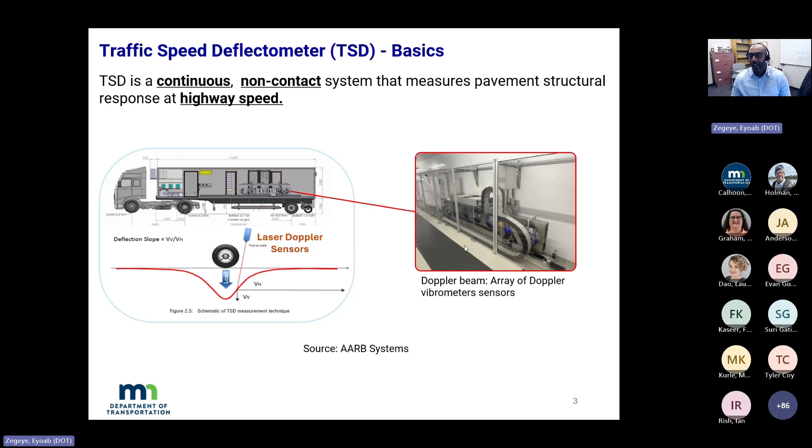So the key advantages of this: it means you don't have any disruption to traffic, you don't need to close the lane, but you are also collecting continuous data. So you have a huge amount of data continuously. You don't need to select where to test, and you can cover large areas, and finally you also reduce the concerns for safety and budgets.

Because of this, this is becoming a very important tool for state DOTs to start evaluating and possibly start using it alongside FWD and other testing technologies.

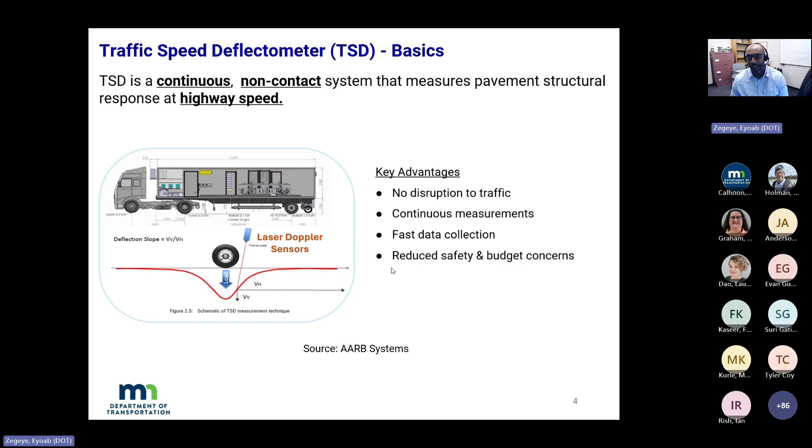So one key difference with FWD, for those who are familiar with FWD: the TSD does not measure directly the deflection of the pavement. What it measures is the velocities, vertical and horizontal. I am using my mouse just to indicate what I'm talking about, so if you don't see it, please let me know. So anyway, the TSD measures the velocities, and from the velocities we obtain the slope of this deflection.

This is an ideal plot, this is the function of a slope. I'm showing here the points where you measure deflection using the laser beams. This is an ideal thing. In reality, these measurements don't fall on this smooth function, they fall all over. So there are techniques you need to do in order to fit the function, from which you can then integrate that slope function and calculate the deflection bowl, which we use in engineering a lot of times.

So this is important that I touch on it before I go to the slides, because this is one of the reasons we are doing the study. When you move from slope to deflection, there are a few things that happen that could go wrong, or could be a source of error. One thing, as I said before, this is not a smooth curve, so you need to fit it. That is one source of error.

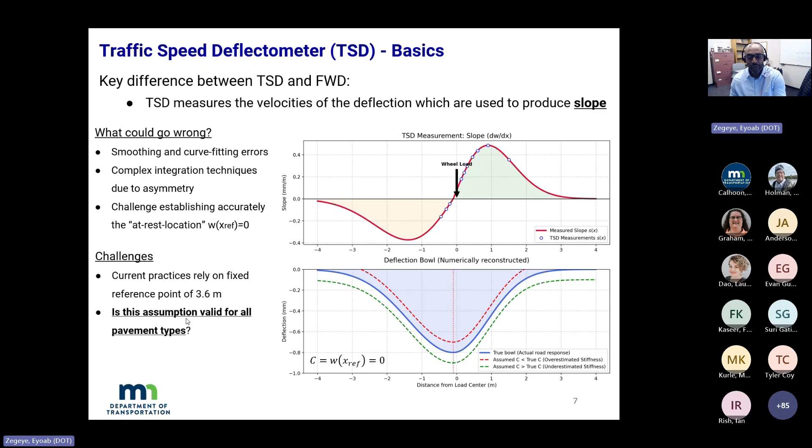What I'm going to argue today also is that the pavement structure, whether you have a stiffer or softer pavement, is going to affect those results. What I mean by that is what I'm trying to show with the results today. We are questioning: is it valid to use the same fixed reference point for all pavements?

So with that, some of the objectives we were trying to accomplish through the study were, first of all, understanding the influence of pavement structures and defining thresholds for critical response so that we can differentiate between good performing roads and bad performing roads.

The other objective is selecting appropriate data processing techniques and providing meaningful interpretation. We are not necessarily doing fundamental or pure research. What we're trying to do here is research implementation: looking at available techniques and seeing how we can use them for our needs, for our data, and how we can scale it up to analyze larger and larger numbers of TSD data.

We also touched on the data preparation procedures: what we have to do before we start analyzing this data. I will touch on techniques for segmentation and gathering supporting information, adjusting load and temperature effects, and some ways for automated techniques for identifying and removing outlier measurements.

Finally, another important aspect is how to manage and process very large volumes of data. Compared to FWD and other methods, we have very large volumes of data. So if you're looking not only to do simple calculations, but also back calculations, this is something we need to start thinking about: how do we analyze this large data, how do we use it, how do we report it, where do we store it, all those sorts of questions.

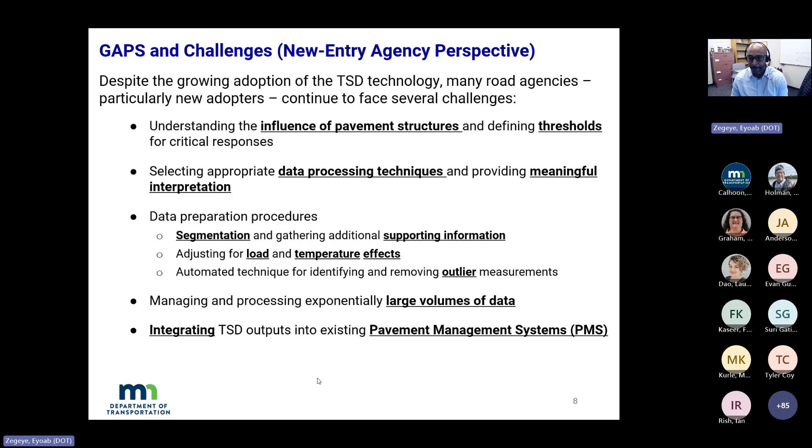The data set that I'm going to use for this study was collected in 2023, and because this was the first time we were collecting TSD data, we purposely selected the routes so that we can cover different pavement types. So we included flexible pavements, composite pavements, and rigid pavements. This data was collected in a day and a half, around 300 miles of road.

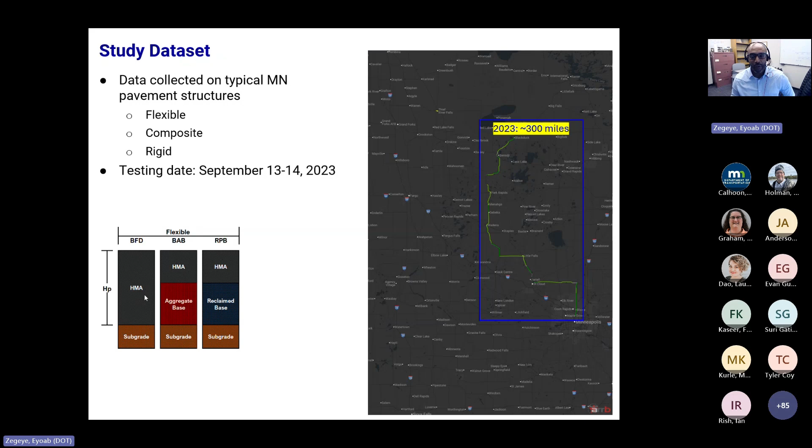So for flexible, we had three different types of pavements. I am using the terms used in MnDOT, but I will try to explain. By the way, here I'm using HMA to refer to bituminous mixtures. Most of these roads have been there for 50, 80 years, before SuperPave. So with HMA, I am referring to all bituminous mixes, road mixes, or HMAs that have been placed, and over the years they've received several treatments. So it's not necessarily one type of bituminous material. It's all mixtures that have asphalt binder.

So here in the first, we have what we call full depth bituminous HMA on subgrade. Then the more traditional is HMA over an aggregate base and a subgrade. Then here, what I'm calling pavement with recycled pavement base - these are originally HMA, originally full depth bituminous or BAB, bituminous over aggregate base, which over the years have been reclaimed. So a portion of the HMA and a portion of the aggregate base have been reclaimed and recompacted to create a new aggregate base, which also contains material from the old existing pavement. And then on top of that, an asphalt overlay is placed.

For semi-rigid, I'm referring to pavements that have been built as concrete, and then when they reach their end of service life, they've been overlaid with HMA to extend their life. Finally, the rigid pavements, which are just concrete. We've used them here just to compare the deflection and slopes from these different pavement types. But as you know, PCC requires different modeling techniques, different analysis methods, so we will not necessarily be talking about PCC a lot here. This is just for creating a benchmark, at least to look at what the slopes and deflection look like from these different pavement types.

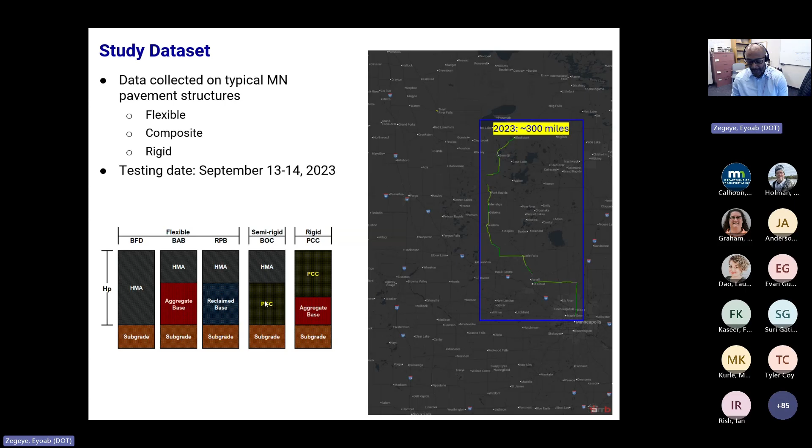So the data preparation part: after we collected the data, we started segmenting it into homogeneous segments, what we call here D-records - basically segments which have similar geometry, structures, and similar history. I must say, because most of these roads have been there for 80, 50, 100 years - this one, for example, was originally built in 1922. It was a concrete pavement, which later became bituminous over concrete because it was overlaid with asphalt. But as you can see, over the years they received many treatments, and there's a lot of information out there. So gathering all this information and segmenting the 300 miles into homogeneous segments took a lot of effort, a lot of time. This is something probably in future that we need to look at how to automate.

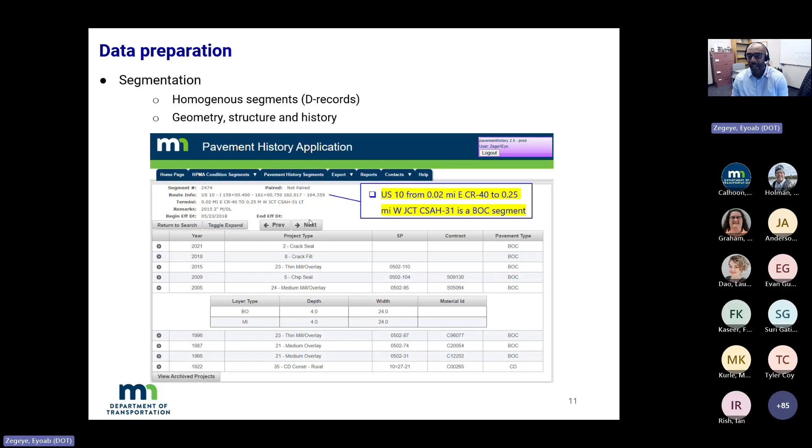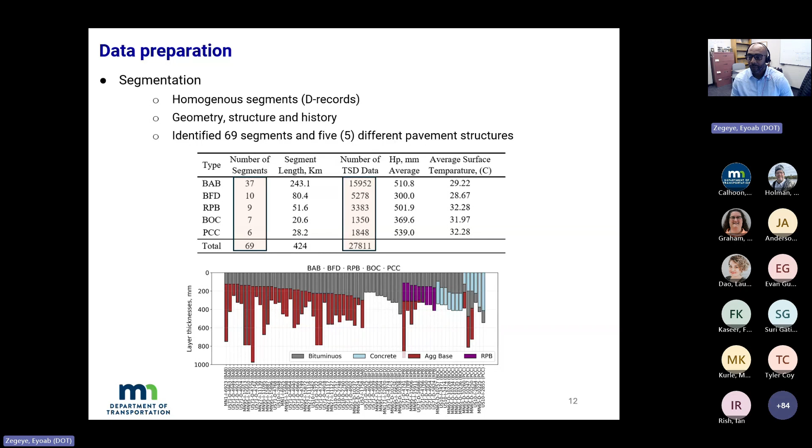So the first thing we did was adjusting for load. This is the load on the right wheel loading during testing. The fluctuation was not that bad, but we wanted also to normalize the deflections.

The deflections were already the slopes, already converted to deflection by the ARB system, so we've been working only on the data that has been provided to us. We wanted to normalize the deflection to 40 kilonewton, or 9,000 pounds, which is normally used. This is a standard loading system that we use for normalizing FWD and also TSD.

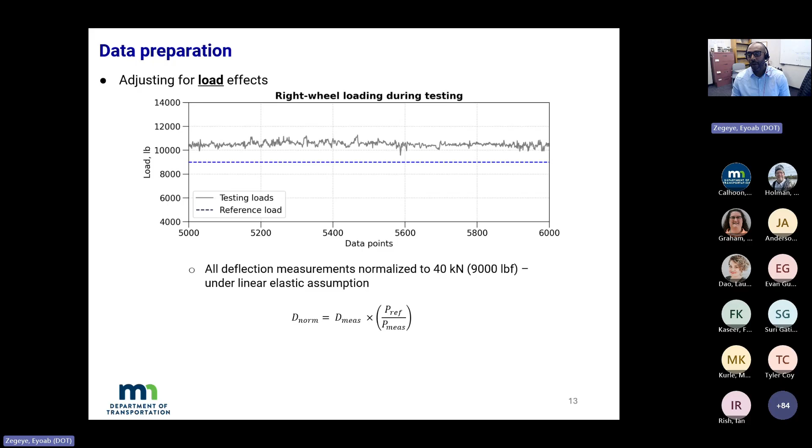It allows us to compare apple to apple deflection measured at the same loading. Once we normalized for this loading, we saw around a 15% reduction, but overall there was no huge effect of loading.

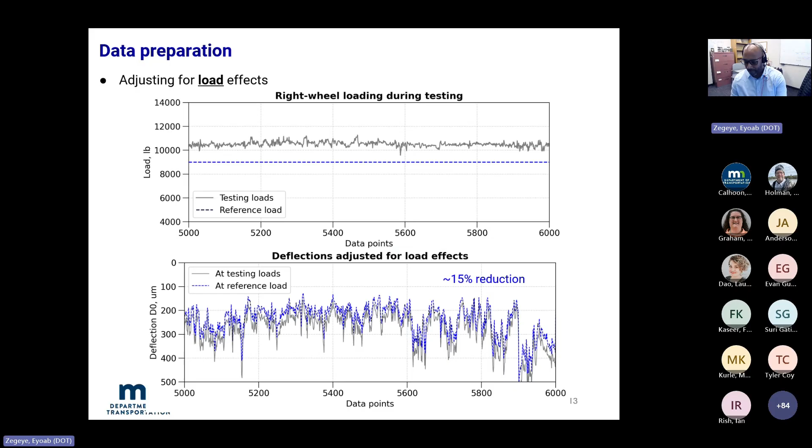On the contrary, as I will show a little bit later, the temperature had a huge effect. We had huge fluctuation in temperature.

So when we tried to see how to correct for temperature, we reviewed different techniques. One that we liked very much was the LTPP guide, which is on the FHWA website - a guide for asphalt temperature prediction and correction. This report has been around for the last 30 years, if I'm not mistaken.

But a lot of us know this report for BELLS equation. We have used BELLS equation to predict the temperature at mid depths for FWD analysis and others. So here we used it in this study, for example, for predicting the temperature at mid depths, knowing the surface temperature and the air temperature.

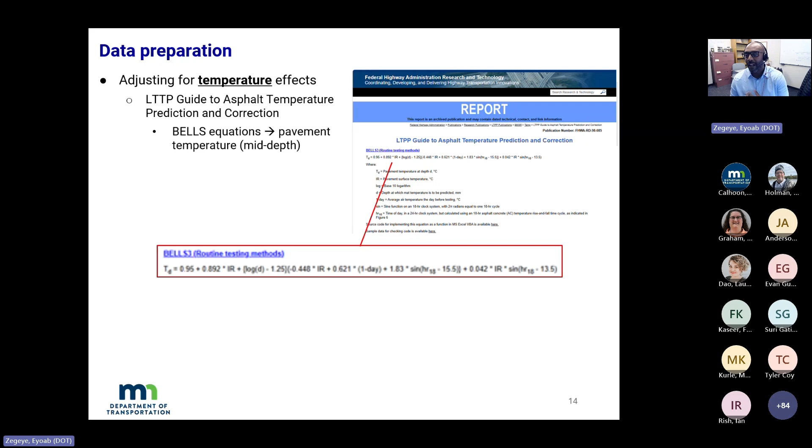But what many people, including me, have not used a lot is the second part of the equation in the report, which basically has what they call delta regression equations.

These are equations that have been developed using data from different testing facilities, including MnROAD, but others also in other parts of the state. So these equations were developed to correct the deflections based not only on temperature, but also on the thickness of the asphalt layer and the stiffness of the asphalt layer.

Here, for example, they are using latitude and longitude, because those are surrogates that tell us the PG grade, how stiff the binder is. Based on that, they are somehow accounting for the stiffness of the asphalt mixture, but they are also taking into account the strength or the structural condition of the subgrade.

These were, in my view, very sophisticated and complex equations. They have not been used a lot because they are very difficult to implement - I looked at the Excel macro, and it's very difficult to implement. But if you take time and understand them, they are very strong, and despite some limitations, a very effective way for correcting basins.

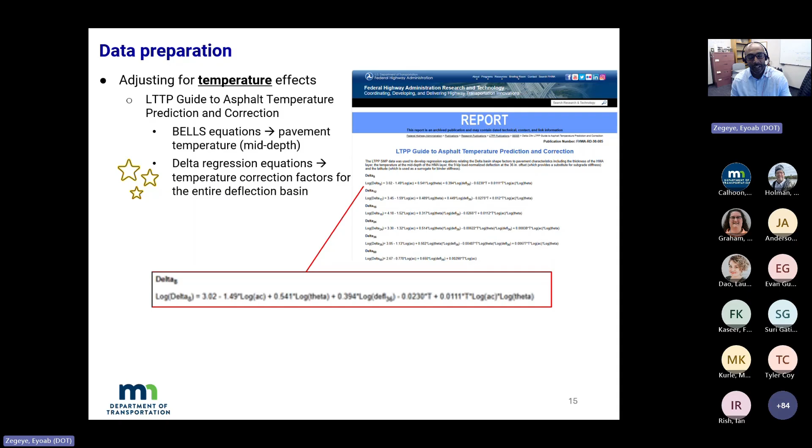The most important part of this regression is that it doesn't correct only the deflection at the loading point - it corrects the entire basin. So now I will show some examples.

So for example, here is the temperature fluctuation during the testing. As you see, early in the morning there was something, and then late in the afternoon there was a huge jump in temperature. It goes from 30 Celsius degrees to around 20.

So when you apply the technique for correcting the entire basin, here is, for example, if you take data collected at this point, almost close - if you correct it to a reference temperature of 21, since there's no huge difference between the 20 during testing and the 21 reference temperature, you can see you almost have the same deflection basin.

What happens if you take this in another place? This is where the testing temperature was around 37, and then if you correct it to 21, there is a huge shift here.

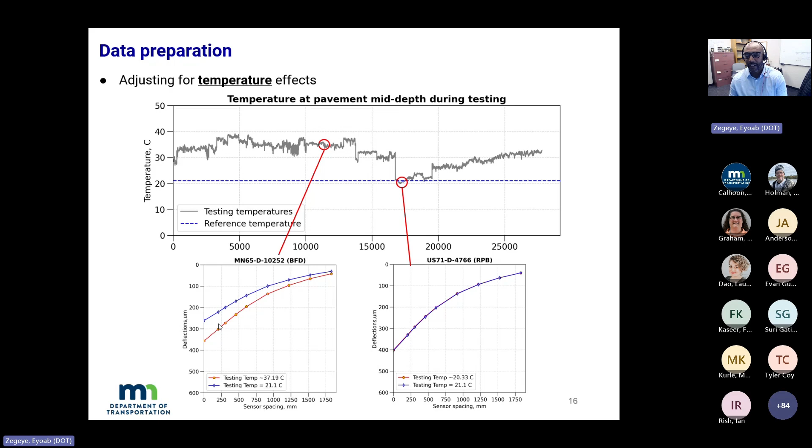So what we did is we applied this technique to the entire data except for the PCC, and then we corrected the entire data. As you can see here, there are areas that didn't need a lot of correction because of when they were collected.

For example, here I'm zooming in only on the data coming from these segments, and as you can see, there are areas where you don't need a lot of correction, and other areas where the temperature correction was needed.

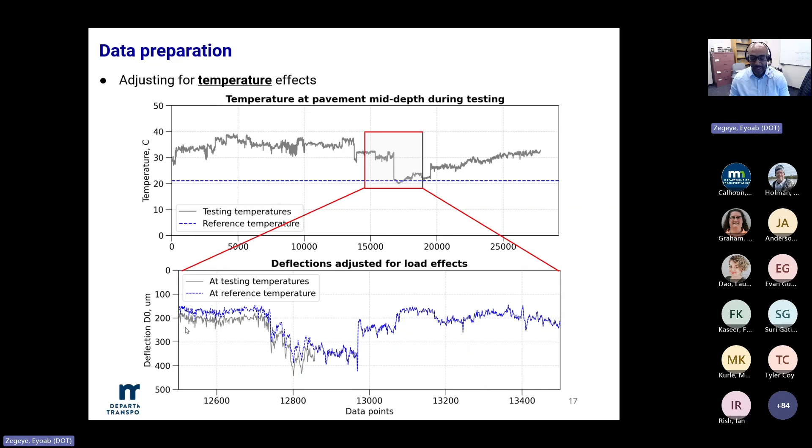After that, we also reviewed different techniques for identifying and removing outlier measurements. The method we ended up using and liked was the statistical method, the Z-score method for outlier detection.

If you use a sigma of 2.58, for example, given the distribution of your data, you're identifying the measurements falling outside of 99% of the data. So if your measurement falls beyond this 2.58, you're considering it an outlier, or flagging it as an outlier. The question becomes then, which parameter to use.

You can use the deflections, you can use some of the calculated empirical methods, but if we use the deflection, we don't have a clue what those limits mean. So once we processed the data using all the analysis techniques I'll talk about later, we examined all the TSD parameters to see which of these could be used as good metrics for identifying and removing outliers.

What we found is that the subgrade modulus, calculated using AASHTO 93 — I'll explain that a little later — we found it to be an excellent metric. One reason is that, since this is the subgrade strength or stiffness, it is less sensitive to temperature and surface layer conditions.

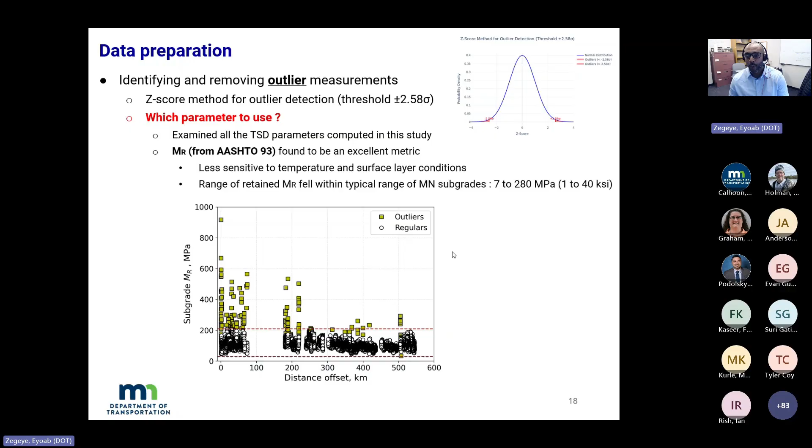But then, when we plotted the data using latitude and longitude, we liked the MR metric even more, because if you zoom in, most of these outliers — not all, but most — were falling into known structural transition zones. For example, most of them were detecting bridges, detecting exit or entrance ramps, transitions to bridges, or roundabouts, which are most of the time made of concrete. So we ended up liking the MR metric even more.

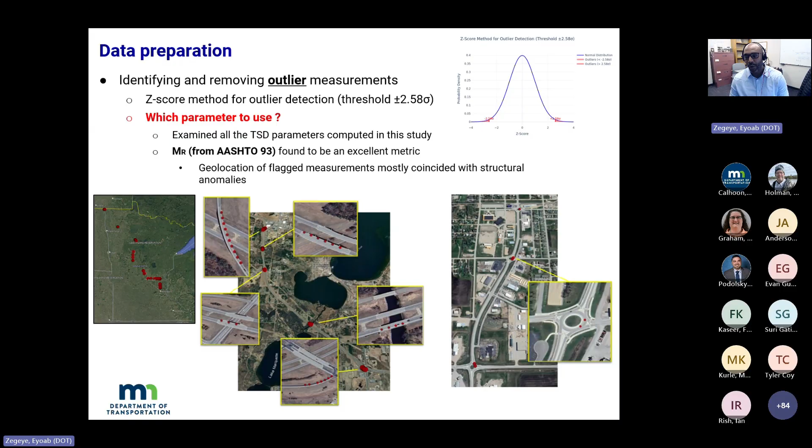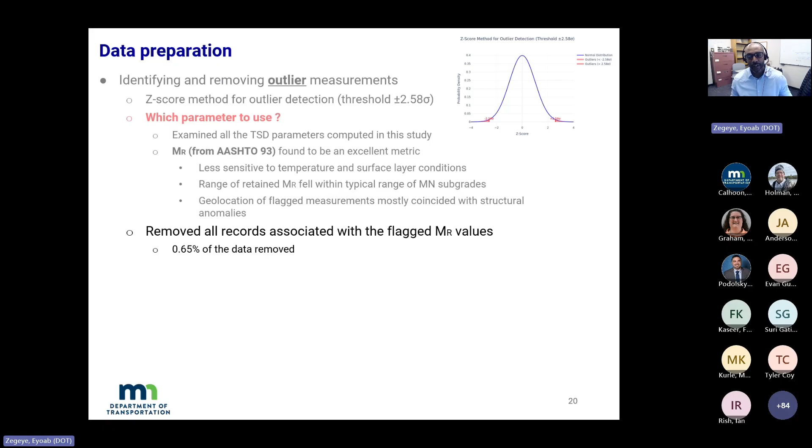So with this, we used the MR metric — once that subgrade modulus value was flagged as an outlier, we removed the entire record associated with that MR value. So next, we moved on and started analyzing the data.

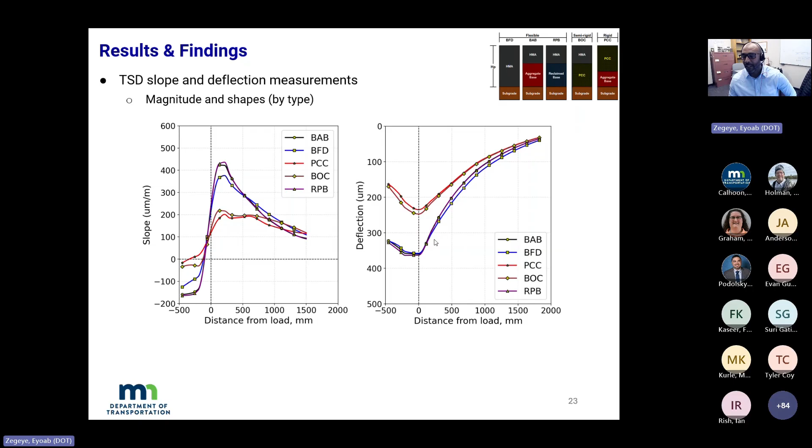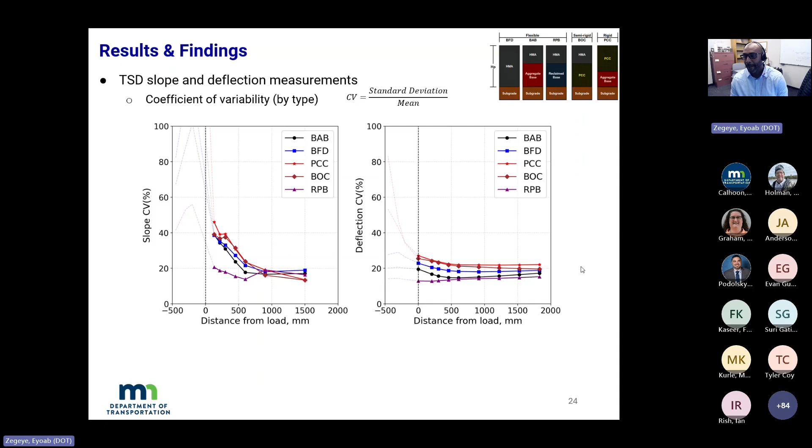So now I will start talking about the results after they have been analyzed using the different techniques.

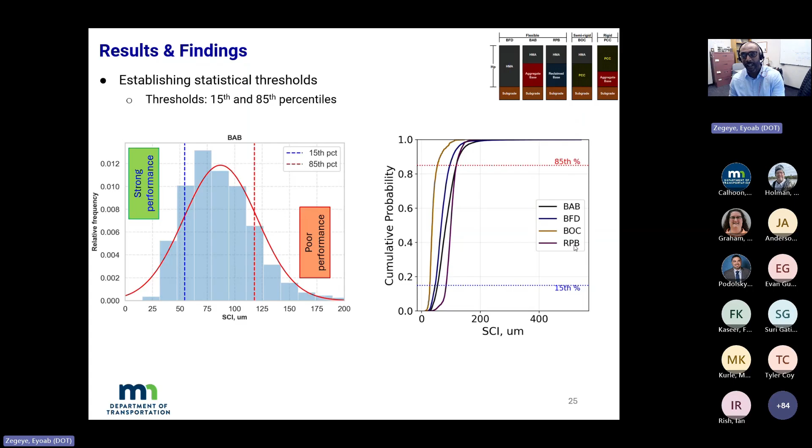The first technique we use is the deflection basin indices. These are very common, popular, and have been used in FWD analysis. These are simple computations, simple geometrical computations, based on the analysis of the deflection curve, or basin bowl, of the deflection. The most common are the SCI, the surface curvature index.

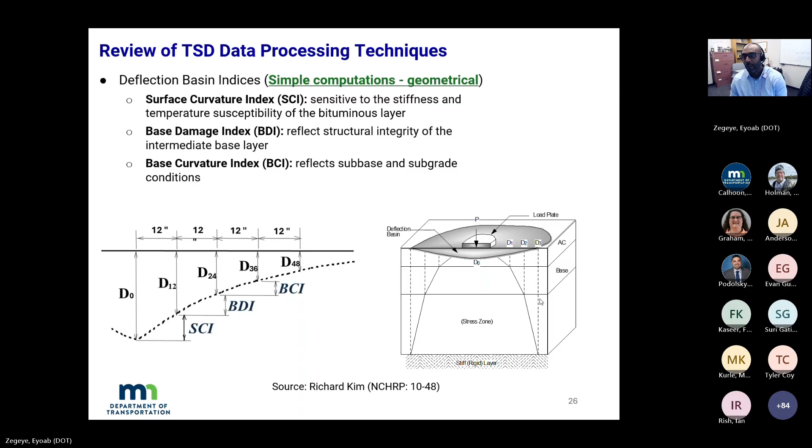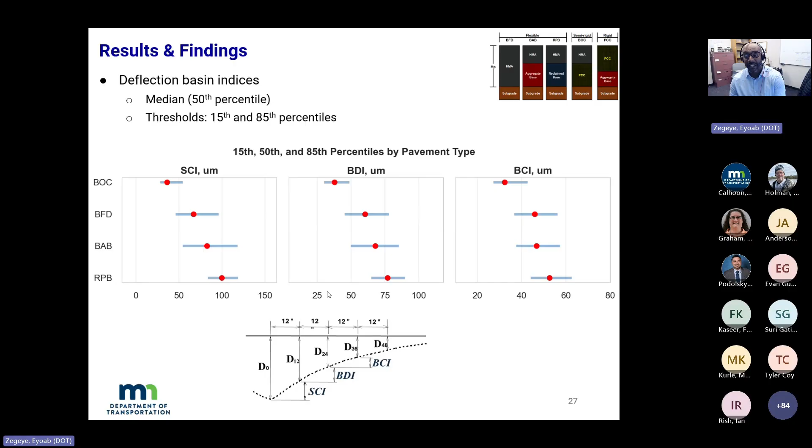I'm showing here, plotting the median and also the 15th and 85th percentile. So clearly these metrics identify the different pavement structures, and they have different values for different pavement sections, some significantly or statistically different.

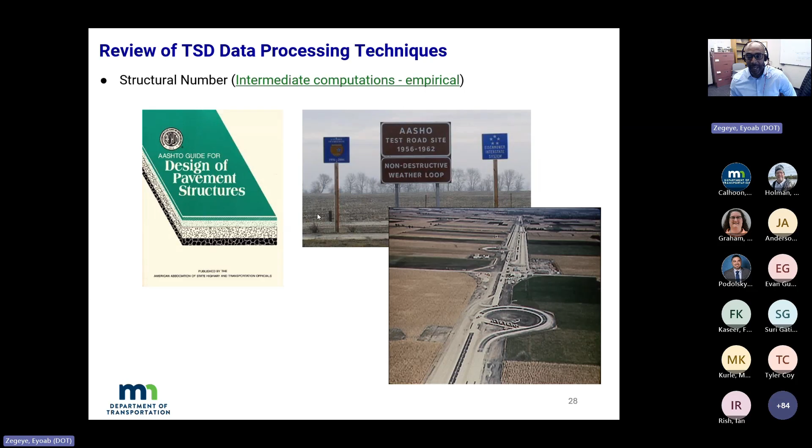Then we looked at the structural number. This is an intermediate computation, more involved. This is a technique developed based on data collected in the AASHTO road test in the 50s. These are empirical equations, associated with the AASHTO 93 pavement design equation.

This equation basically relates the anticipated traffic volume to the structural capacity of the pavement, to the strength of the subgrade, and to the functionality or serviceability required of the pavement.

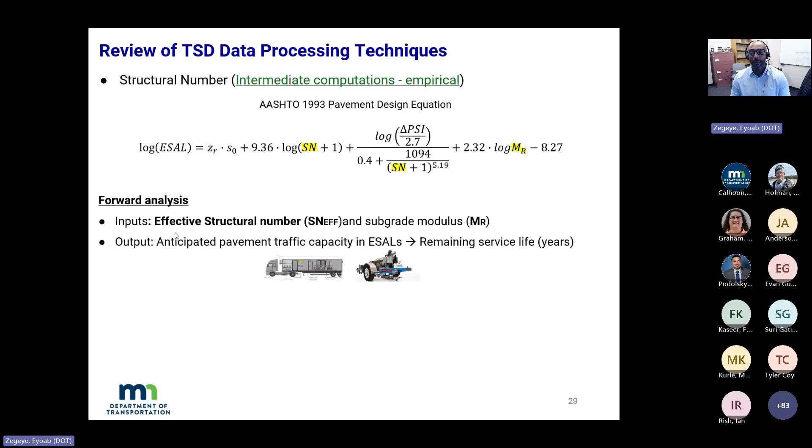You can do forward analysis of this equation: if you know the structural number, in this case the effective structural number, and the subgrade modulus, you can directly calculate the anticipated pavement traffic capacity, ESALs, which can then be turned into the remaining service life of the pavement. This effective structural number can be determined from TSD or FWD.

Otherwise, you can do the inverse analysis. If you know your desired pavement design level ESALs, you can back calculate to get the required structural number from this equation. So there's the effective structural number, determined from TSD or FWD, and the required structural number coming from the design equation, which most of you are familiar with since it's used to design layer thicknesses.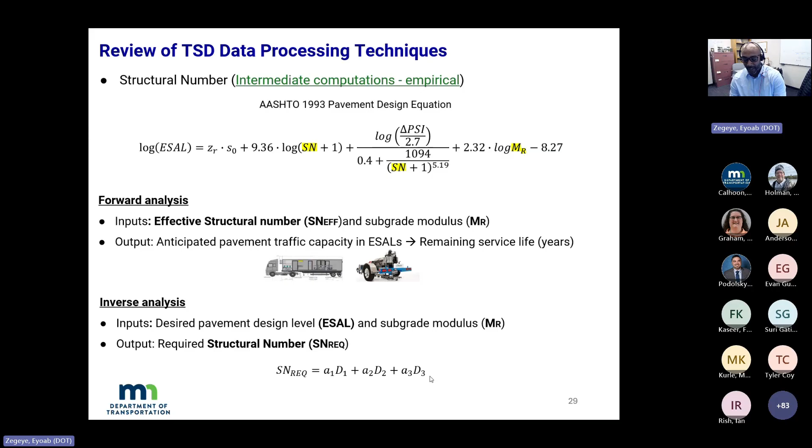The AASHTO 93 also provides equations for calculating the structural number and effective structural number. These are more involved, requiring iterative calculations, from which you obtain the effective structural number, the modulus of the entire pavement above the subgrade, and the subgrade resilient modulus MR.

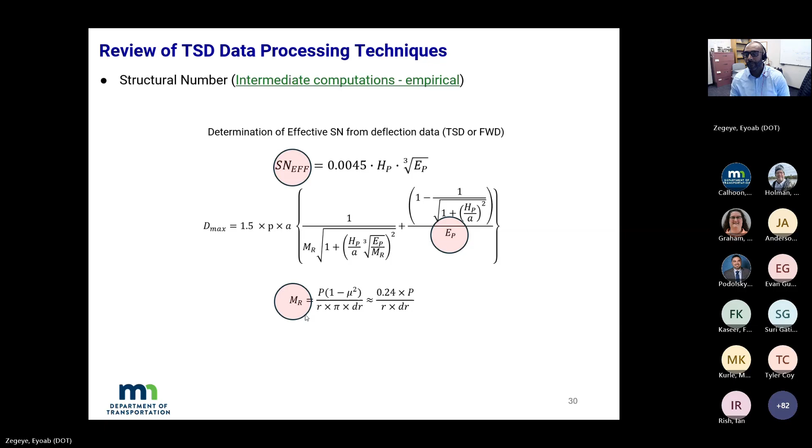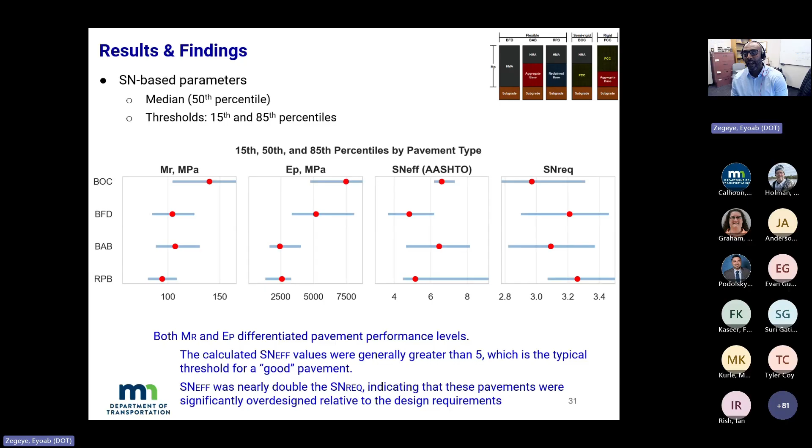We also looked at how this equation can be used to calculate the remaining service life, the ESALs. What we saw is that this equation is highly sensitive to the structural number and to MR, the subgrade modulus, because the subgrade modulus and structural number are used in their log version.

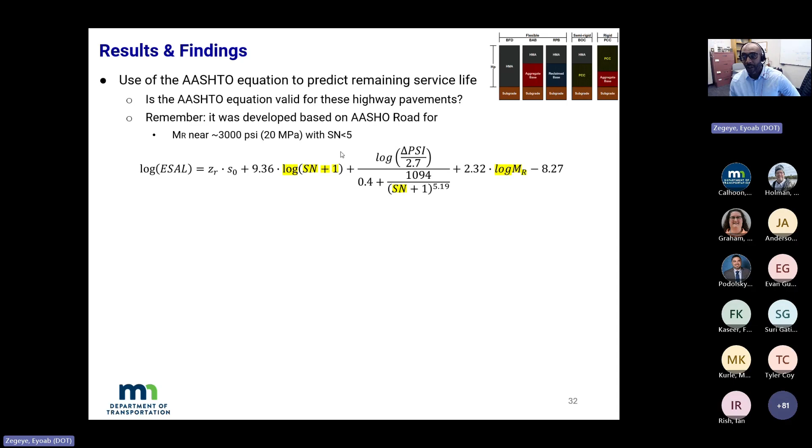When we reviewed the AASHTO publication, we found this equation was designed for subgrade modulus around 3000 psi, 20 megapascal, and structural numbers less than 5. When you use it for highway pavements like we did here, it starts giving you unrealistic numbers, because our subgrade moduli were much higher than 20 megapascal, on the range of 100, and our structural numbers were much higher than 5.

This is a question we would like to bring to the industry. Our view is that the structural number as it is, is not necessarily a good technique for processing TSD data from highway pavements, maybe more suited for low volume roads.

So then next we did back calculation. This is very complex computation. For back calculation, we adopted a software previously created for analysis of FWD data through a collaboration between University of Minnesota and MnDOT. We've published several papers on it, and last year we also reviewed its application for TSD data, so you can refer to that paper. But I will quickly tell you the main features of this software.

This software, in my view, is very slick because it can be used for batch processing. What you do is bring all your TSD deflections into a file, along with pavement geometry, layer thicknesses, traffic data, and temperatures, and put it into the software.

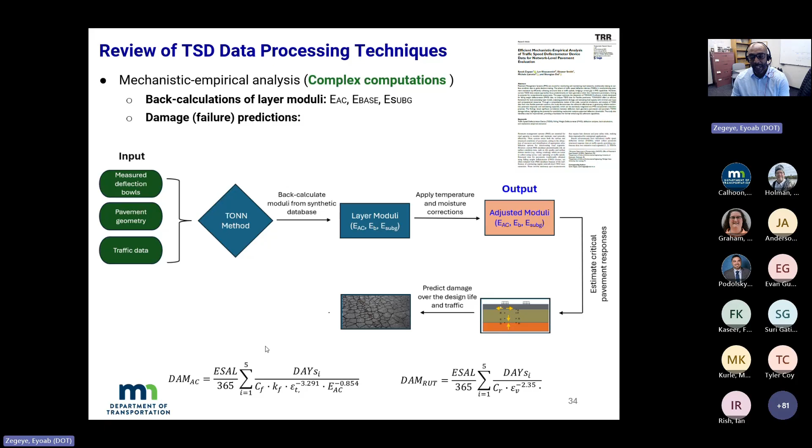Finally, it uses damage equations to calculate the damage indices, the fatigue for the asphalt layer and the rutting for the subgrade, and outputs the tonnage. All this is done automatically, taking about 7 seconds for 100 deflection points. So all this data I'm discussing was calculated on a regular computer in around 20 minutes. This is why we like it.

We are upgrading this technology now, with another contract with Michigan State University, to add some features, though as it is, it's already very strong.

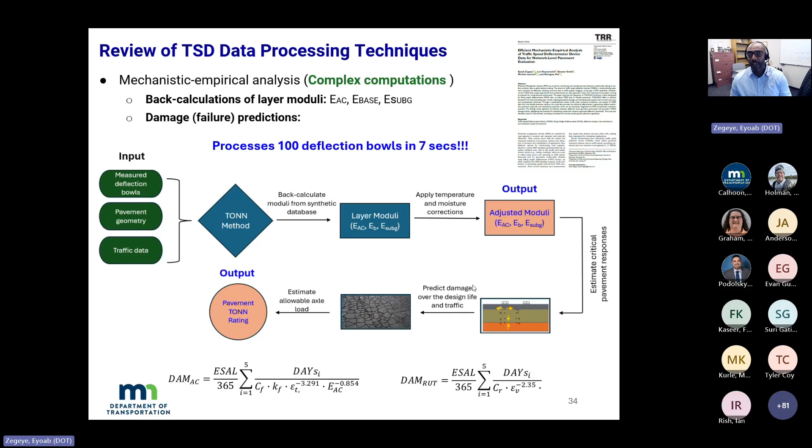The current version of the tool only allows for 3 layers, so we are not showing the BFD results here because that software wasn't necessarily designed for 2 layers. Here I'm looking only at the 3-layer pavements: BOC, BAB, and RPB. We saw it can calculate layer moduli.

I've also put the layer moduli results in a table. They were quite reasonable. One thing, maybe for the concrete base, I would have expected a somewhat higher base layer modulus, but in general they confirmed what we saw for the others. They do distinguish between materials and between pavement types, and they say almost the same thing.

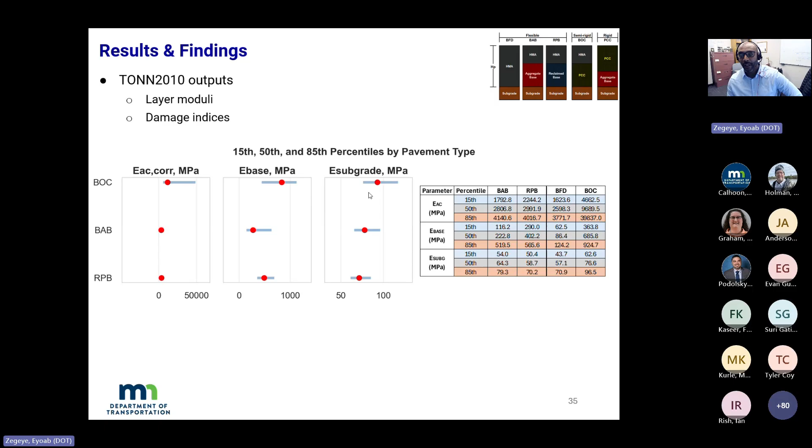One important thing that came out of this study is when we compared the subgrade modulus calculated from the finite element analysis with the one from the AASHTO MR equation, we found the AASHTO MR is 40% larger than what we get from the finite element analysis. This means the AASHTO method is overestimating the subgrade conditions.

We then looked at the fatigue damage on the AC layer and the rutting damage in the subgrade. What we saw is that pavements considered in this study, which have been there for 50 to 80 years, are more likely to fail due to rutting in the subgrade than to fatigue cracking in the asphalt. This is expected, because we do a lot of work on the top layer—for budget reasons we can't always reconstruct entire pavements, so we upgrade the top layers instead.

So because of this, I think the results are demonstrating, confirming that our pavements are more likely to fail due to soft condition of the subgrade, or subgrade rutting, rather than fatigue cracking, in the absence of any other distress modes, potholes and everything. If your main concerns are only fatigue and rutting, our pavements are more likely to fail to rutting than fatigue cracking. So we are over designing the top layer. We are doing a very good job on the top layer. Of course, for budget concerns, the subgrade is what it is.

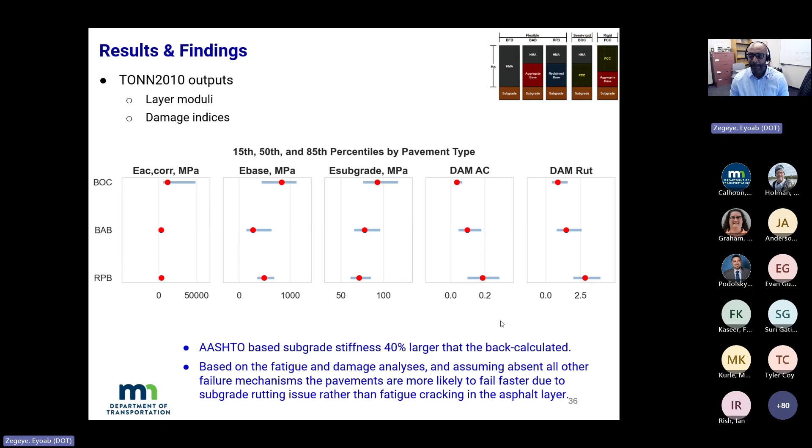So then we also looked at ways to calculate the remaining service life using the fatigue failure model. These are the fatigue model and the subgrade failure, rutting failure model. What we did is we looked at this equation relationship developed by Rada et al. in 2016. So basically, you don't need back calculation in this case. Once you have the SCI, the deflection basin index, you can come up with the critical strain, the strain at the bottom asphalt layer and the asphalt layer modulus, and then input this in the fatigue failure model. An easy way to do it.

We also looked at the strains and the layer modulus calculated from the TONN software. I just want to mention here, the TONN software does account for different seasons, so it has layer modulus in the fall, in the summer, and also in winter. What it means is, in winter, if you use TONN software, you're expecting less strains at the bottom of asphalt. In summer, you're at the highest. So on average, the strain calculated from the TONNs are lower, much smaller than the strains calculated, for example, by Rada, which was calculated only for one reference temperature.

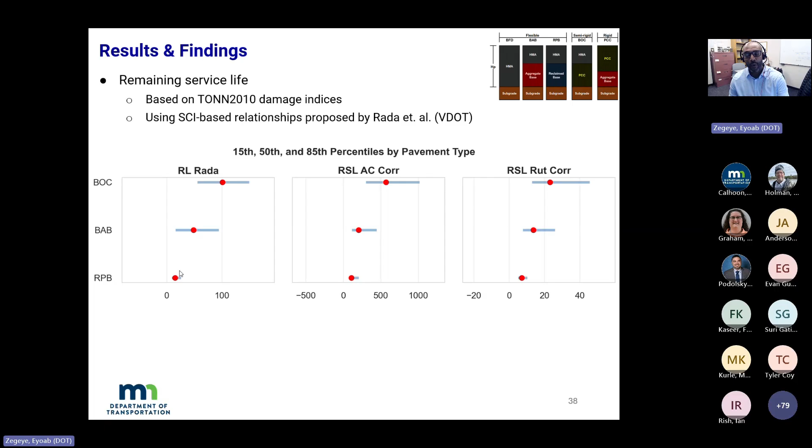So when we look at this difference, we saw that they are very well correlated, but the numbers were very different, because again, the TONN software here is assuming much smaller strains than the Rada. But in general, this shows that the concept of using remaining service life, once we calibrated our equation for our pavement, this is a viable way of doing it.

Again, here I'm showing the strains calculated by the TONN and the tensile strain calculated by the Rada equation here. They are very well correlated, but again, the Rada are much larger than the TONN. Similarly, the layer modulus from TONN and the layer modulus from the Rada. So this confirms for us this is a viable way, either you do it using the SCI base, which is easy, then you don't have to do all the back calculation, or the base, the TONN2010. They tend to tell the same story, but the numbers are very different.

Then we wanted also to explore the relationship between the different metrics, the DBIs, the deflection basin indices, the back-calculated indices, all of them. The reason is we want to confirm whether some of them are saying the same thing or not. We already saw that the structural number was giving us mixed numbers, we are questioning its application. So now we also want to compare it, for example, to the mechanistically back-calculated results and see what they tell us. So here, we examined all the data that was available for us, and we compared them one-to-one using linear and nonlinear correlations.

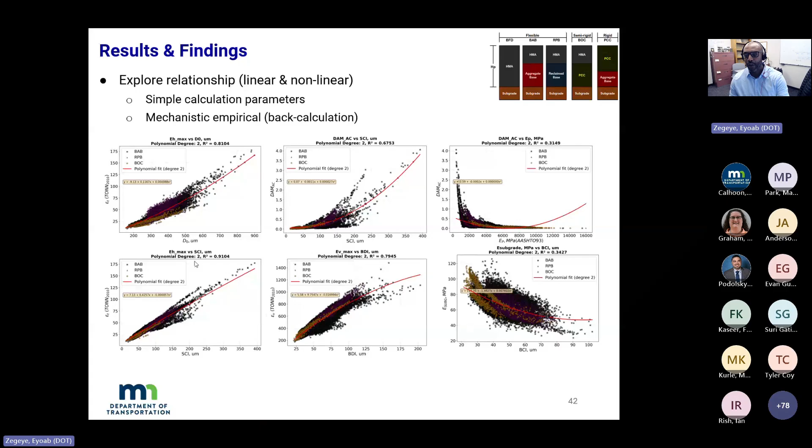Here, for example, I'm showing you some of them that showed very good correlation, and there were some that showed very bad correlation. And then we also divided them into categories: those metrics that are simple to calculate, and then the metrics that may be coming from mechanistic-empirical back calculation, in this case, TONN2010 software. So all these results can be nicely summarized in a heat map like this.

So here in the heat maps, I'm showing on the y-axis all the back-calculated mechanistic properties, and on the x-axis, the simple-to-calculate metrics. And here we have all the R's, basically we are measuring the goodness of fit of the correlation. So if you have R-squared larger than 0.5, I have flagged them for you to see.

What we saw is that the slope, or the deflection at the loading point, were very well correlated with critical response in the pavement, both the tensile strain at the bottom of the AC and the subgrade. So the D0 was also correlated well with the damage indices that we calculate from the TONN. Then we also saw that SCI and BDI were very well correlated with all the critical strains, not necessarily with the layer modulus. What caught my attention, and this is the second time we're seeing it, is that most of the time we use the SCI as being the best metric for evaluating the top asphalt layer, but the BDI was showing more and more correlation — we also looked at this in other data — it was showing more correlation to the damage indices in the AC and the subgrade. But in general, the SCI and BDI seem to be very well correlated with all the mechanistic responses.

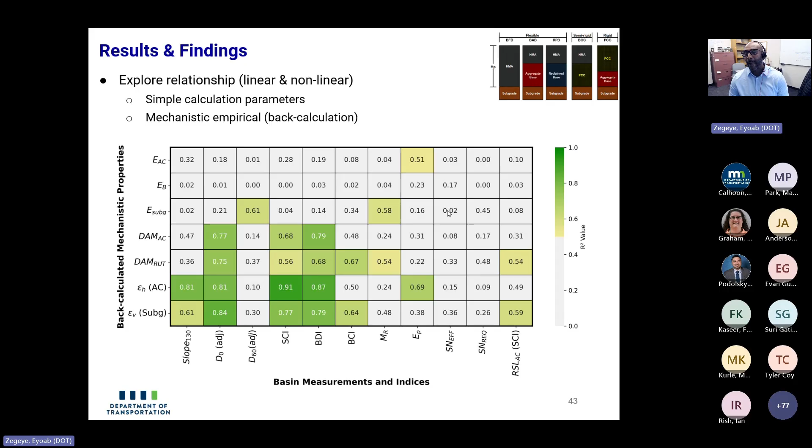So now, once we bring it all back, what do we do with all this data? Here we have all the data that we calculated, the 15th, 50th, and 85th percentiles, and we have summarized them. How do we use this information for network level planning or project level screening?

Based on this information that I just showed on the slide, if we decided that SCI is a metric we would like to use for our network level evaluation, we would take the SCI, for example the 85th percentile, to flag good performing and bad performing roads. We will have different thresholds for the different pavement types: BAB, RPB, BFD, and BOC.

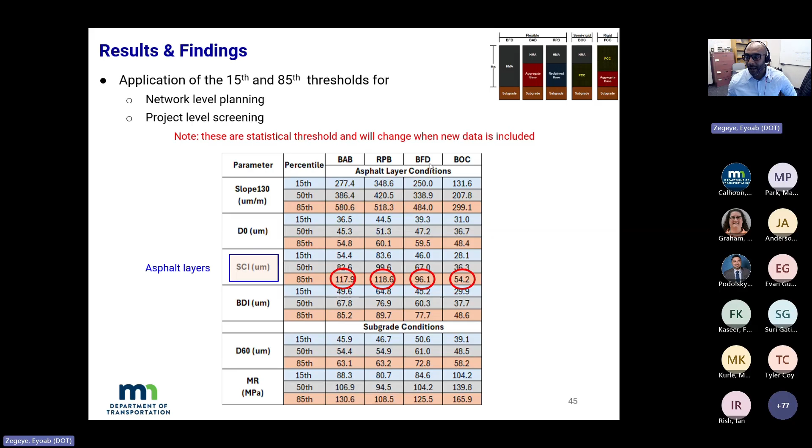Then you can plot all your data. Each of these bars represents the data coming from each of the road segments that we analyzed. Here we flagged the road data that have measurements more than 50% exceeding the 85th limit I just showed you. In this case, we found 11 of these road segments were flagged as poor performing roads.

We had several discussions with the project owners. They are further evaluating these roads now, but it does look like it matches their observations. They were having some issues with these roads. So this is for network level planning.

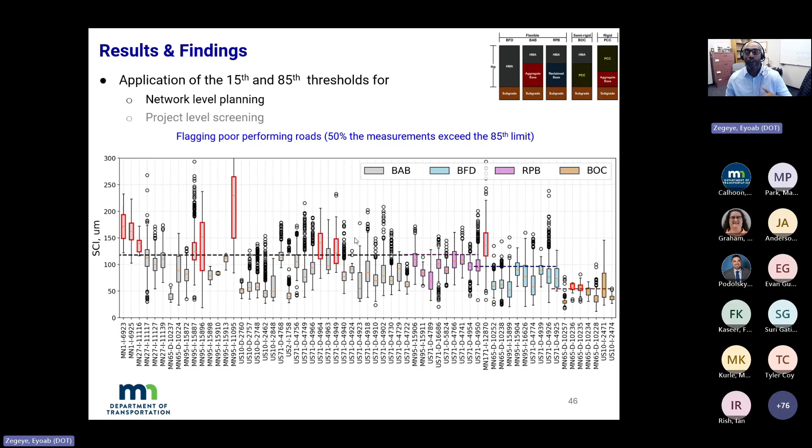So what does it tell me? This tells me that your problem is localized issues. So whatever these problems are, probably you need to take care of this location before you come up with a solution for that pavement.

On the contrary, in this other section, you can see the problem is not only localized, it's extensive. In this case, it would probably be more budget friendly to basically repave, have the same treatment for that entire segment.

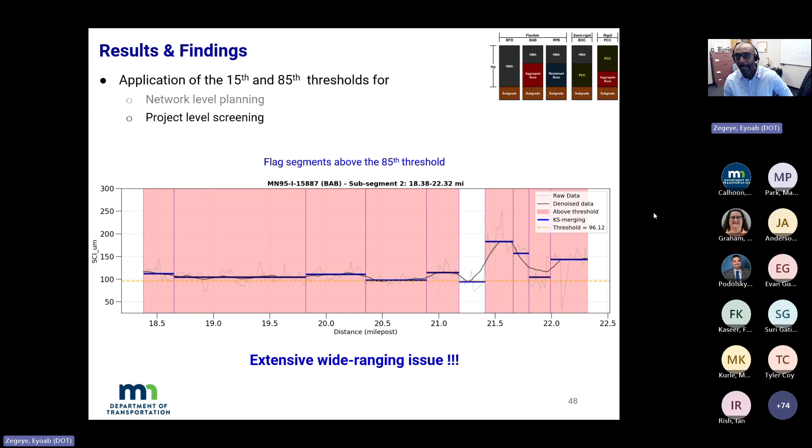We also tried to see correlation with distress indicators. We didn't see any correlation with measurements taken at the same time. But that's for another time.

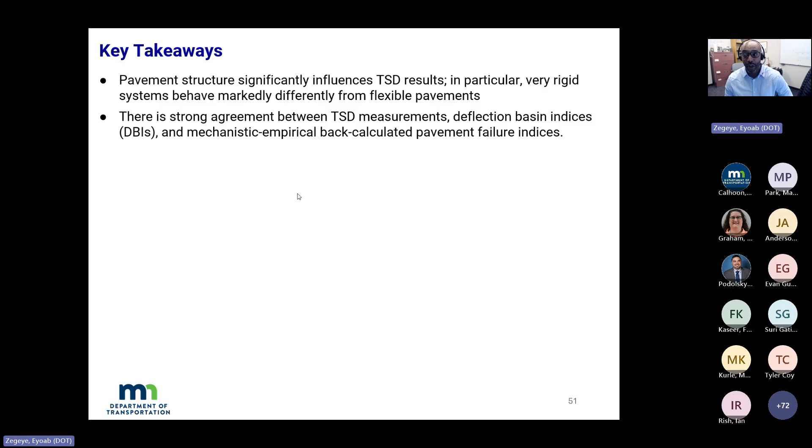Some key takeaways: pavement structures significantly influence TSD results, in particular very rigid systems behave markedly different from flexible pavement. There is strong agreement between TSD measurements, deflection basin indices, and mechanistic-empirical calculated pavement failures, except for the AASHTO 93 calculated structural numbers. So the question is, are these structural numbers good for TSD or not? In our view, we don't think they are proper for that.

We also showed how statistical thresholds can be effectively used for pavement screening, both at network level and project levels. Overall, the data indicate that pavements in the study tend to have weaker subgrades compared to the upper layers, making them more susceptible to subgrade-related failures than other types of damage.

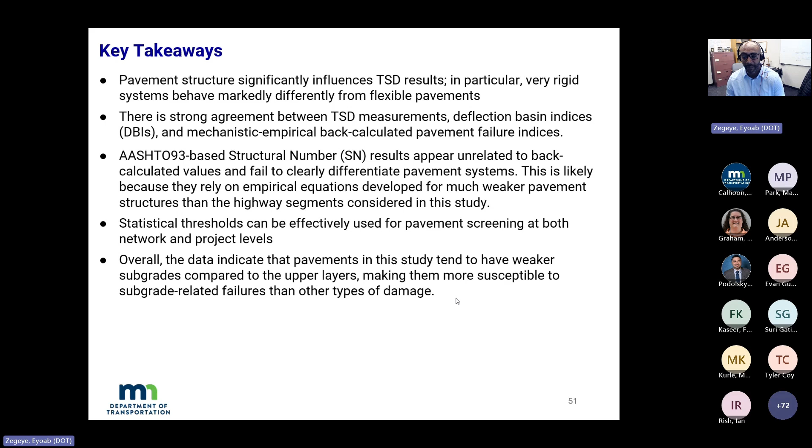What's next? Since 2023, we have been working with our material engineers to identify routes that are good for testing. In 2024, we collected 200 miles; in 2025, 900 miles. Now we will apply what we learned on this road and basically increase our database.

The thresholds that we propose are statistical. So the more data we get, probably they will get closer to the true number, but definitely that database is going to change. This is going to be a dynamic thing, but at least this is what we are doing.

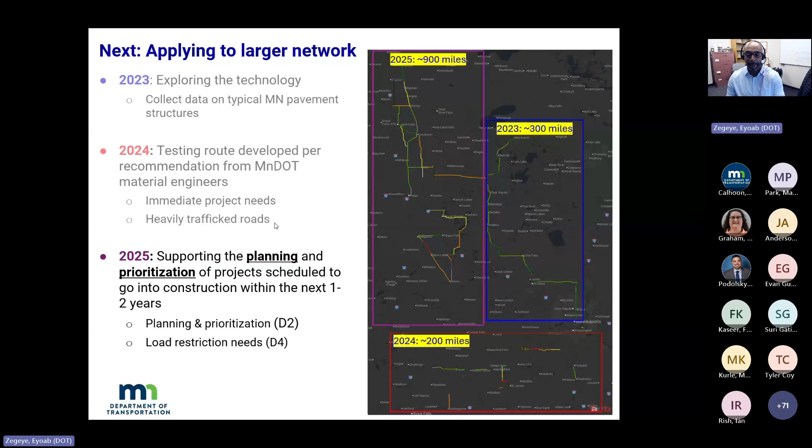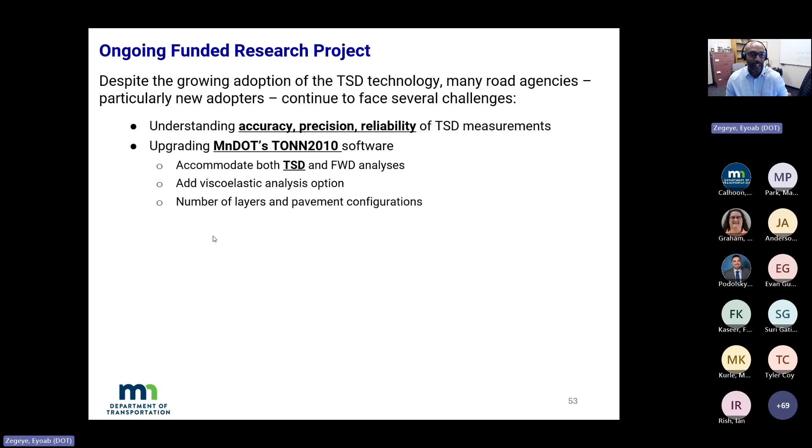The other thing I would like to acknowledge: we do also have funded research projects looking at the accuracy and precision and reliability of TSD measurement, and another study to upgrade MnDOT's TONN2010 software to add some viscoelasticity models, increase the number of layers, and include both TSD and FWD simulated synthetic database. These are funded, one by NRRA with Professor Soheil Nazarian, and one funded by MnDOT directly with PI Syed Haider from MSU.

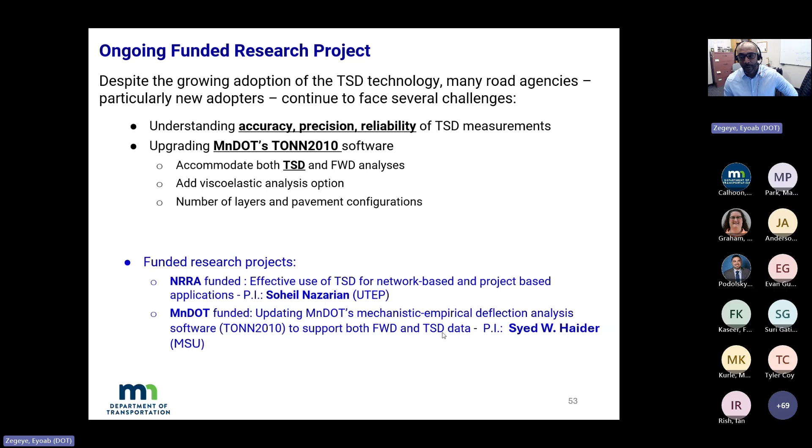With that, thank you for the attention. I will leave the floor for any questions you may have.

Lauren, the floor is yours. Oh, I do see some questions. Lauren, can you help me see? I don't know how we're doing with the time.

So, for example, Bernard, do you want to articulate your question? I'm looking at it. So here I see a question: why is 15 and 85 percentile used for the threshold?

There is a good paper by the group in Italy, Professor Francesco Canestrari, on that. That wasn't my question, Eyoab. That's not my question, sorry. Go ahead, ask.

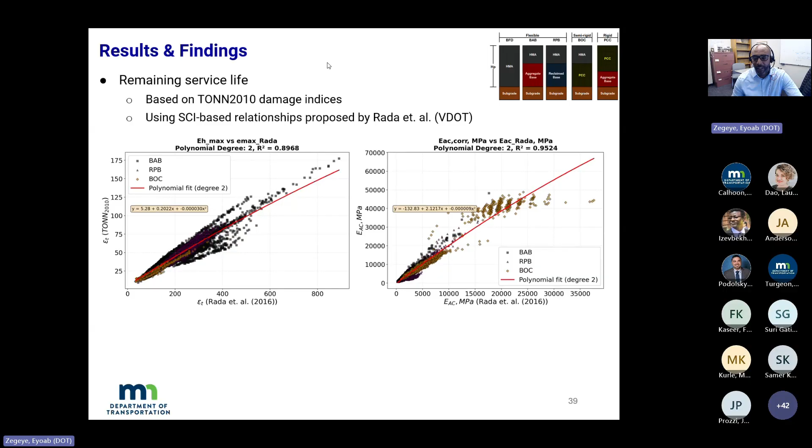Again, that is simulated data. You're right, but that's the point I want to make.

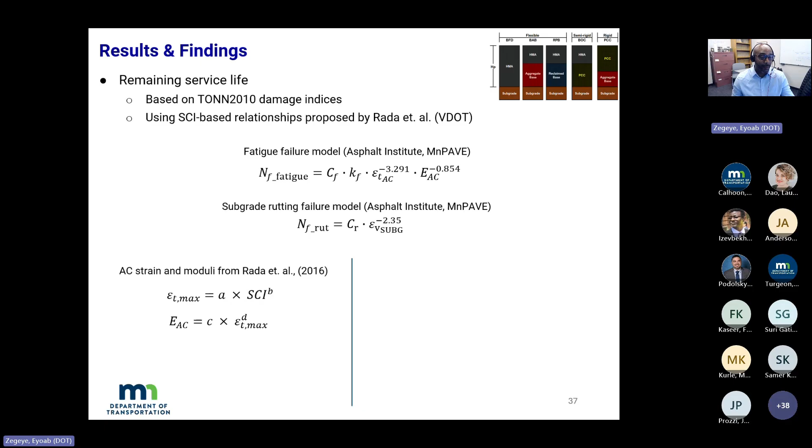With regard to outliers, that's something we thought about many times. We went back and forth. You're right, you don't want to remove things that are actually bad and part of the pavement. That's why we ended up plotting them on the geographical map just to see where they were falling. We also left it very loose, looking at sigma 2.53, and at data falling outside of the 99%. So a very limited number - at the end we ended up removing only less than 1%. But I agree with you, that's a difficult balance to find. You don't want to remove outliers that are measurements part of the study. I agree with you, thank you.

I think someone has a question. Prajol? Yes, this is Prajol from Tensar.

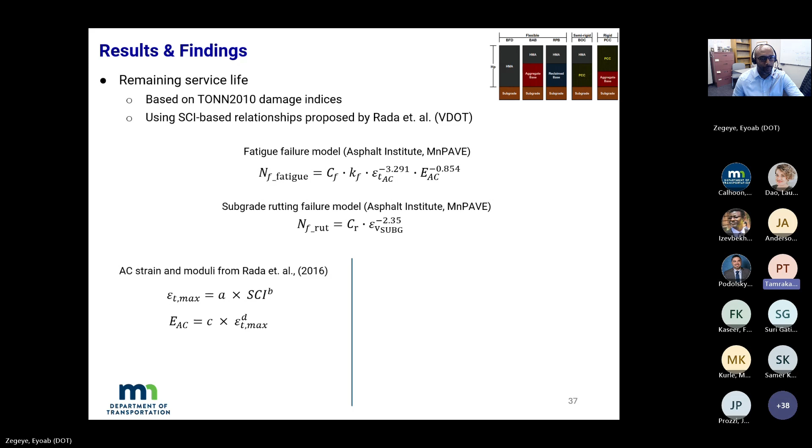I have two questions, and I think you've already partially answered the second one. For the first, I'm wondering - when you were analyzing your TSD data, you were just correlating with MR and structural number. But as we're also looking at the performance of the road, when analyzing TSD data within the AASHTO 93 design framework, maybe we also need to look at the serviceability index, delta PSI. What's your thought on that?

Very good point. In this case, because our roads were all highway roads of mostly similar class, I just used a fixed DPSI. You're right, you could investigate further by having different DPSIs for serviceability and functionality of those pavements, but I wanted to focus more on SN and MR, so I just used the same. They were all falling in the same route, with similar traffic levels and similar history - that's something we could extend to, but in this case we didn't. We just used the fixed DPSI.

Okay, that's great. For the second one, a very small quick question - you already mentioned there's no correlation between TSD data and distress, so for PCI it won't be related. Have you also evaluated if there's any kind of correlation between TSD data and IRI?

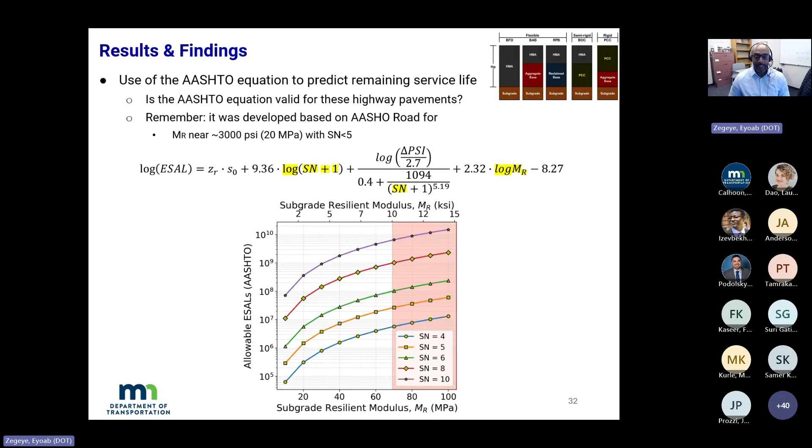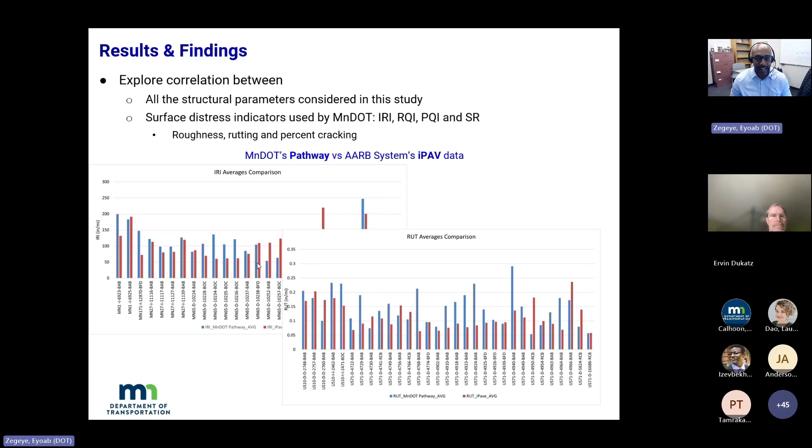Yes, I was going to show some data. Since you bring it up, what we saw is we looked at IRI. I was hiding the slide so it's not showing, but I can show it quickly. Do you see my screen still? Yeah, we can see. So we looked at IRI.

We also have what we call RQI and PQI. These don't take into account only the roughness of the pavement, but also other distress like cracking numbers and rutting. So we tried to examine if there was any correlation with the TSD data. These were collected in the same months, not necessarily the same time, but in the same months using a different system. What we saw was there was no correlation.

But again, we should not even expect any correlation, because this is just a test at one point in time. What I'd like - we're doing some investigation - if you collect TSD data and IRI, roughness, or cracking over time, I would suspect that pavements with bad structural condition will fail faster than ones with strong structural condition. So we shouldn't be looking at correlation alone, we should look at deterioration models. That's my view.

Oh, that's great, thank you very much for answering all those questions. Thank you, thank you.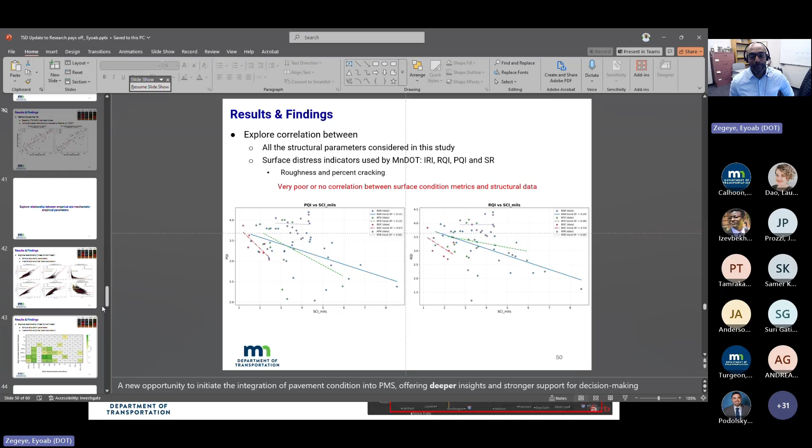I also wonder, Jocelyn, about the use of polynomial fits on slide 42. What would be the model justification? It was not a polynomial fit. There is no fit here. The results were reported to us by ARP, and we just connected the curves. They were already integrated, and these were the results reported to us. Slide 42.

Okay, Mahdi, nice presentation. The work clearly demonstrates practical implementation and use of data. However, please note that some of the analysis relies on several simplifications, particularly in temperature correction and in estimation of metrics such as structural number, critical strain responses, and other related parameters. It would be beneficial to highlight these limitations and consider device-specific approaches, some of which are already available, while others may require further investigation. Great and significant.

Thank you, Mahdi. I agree with you. What we did here is look at the available techniques. Some of them have higher limitations than others. In the case of temperature, we like the temperature correction model because it corrects the entire basin and it looked good, but there are again limitations with it. There is further investigation needed. I know you're working a lot on that. We also have Sohail working on similar things. So I agree with you.

Thank you, Andrea. And then Yuma. Thank you, Yuma. And Samer, if you are here, I don't know if you want to add your comment, articulate your comment yourself. Which one? Back calculation? Yes, the back calculation, and then you have also survey providers could use the median instead. Oh, okay, if you can comment on that.

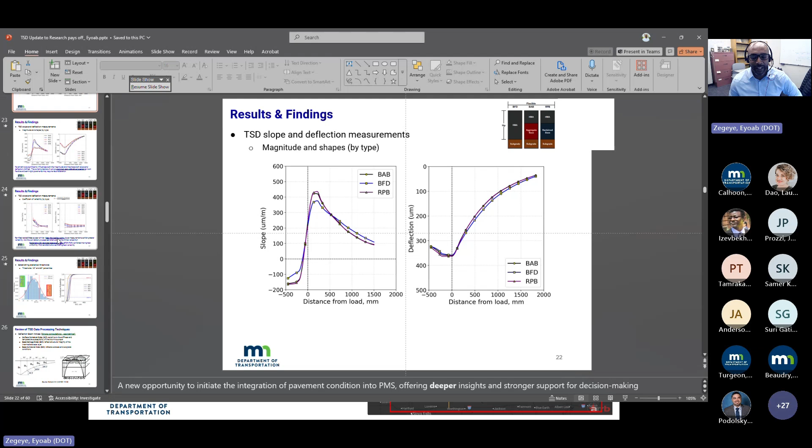We solved this iteratively. There is a procedure in AASHTO 93, and Peter from ARP system also had a paper on that. You can solve this equation trying to find which sensor gives you the lowest MR. It's an iterative process, running this many times for all the sensors and finding the sensor that provides the most critical, smallest number of MR. Most of the time it's the 36 inch sensor, sometimes it's the 60 inch sensor. I hope I answered that.

That was my question. I was trying to see if that's a stress softening soil issue. If you're using the farmost sensor, potentially that's overestimating those modulus values if it's a stress softening soil. My question was on that, because a lot of people use the farmost sensor in FWD analysis, and they could probably start picking the wrong value depending on the nature of the soil.

In our case, I don't have it on top of my mind, but most of the time it was 36, 48, or 60 based on this iterative equation. We didn't hardcode it, we just solved this problem and automatically found which sensor was critical.

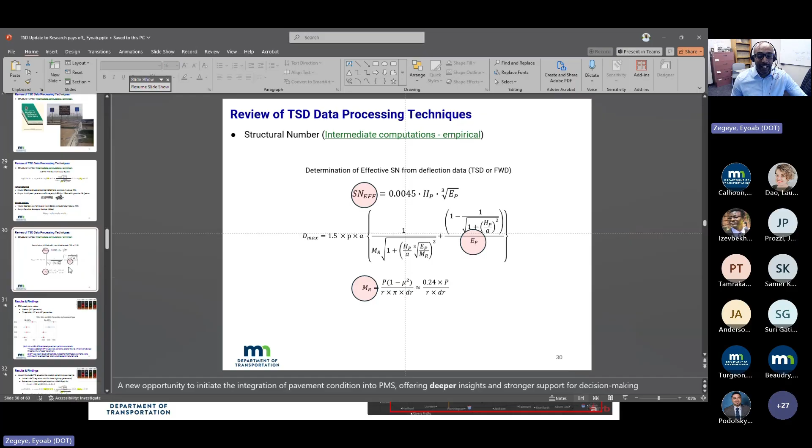But we also have the TONN2010 software that I showed here, which is very aligned with MnPAVE. It's a mechanistic back calculation which results, for example, in damage indices that were calibrated on a few limited test sections in MnROAD. One reason we were seeing very high or very low damage indices is because that software was not necessarily calibrated for highway pavements. That's something we're doing in this new work, the upgrade. We want to calibrate the TONN2010 software for highway pavements. I hope I have addressed that.

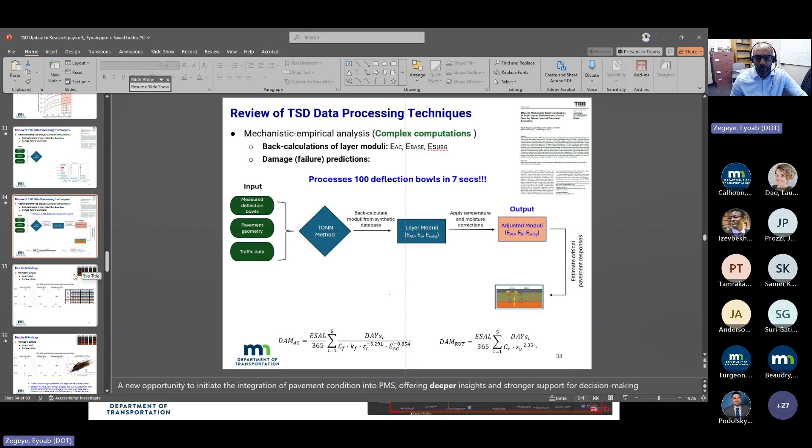Thank you, Ali. Slide 25: what is the source of the data, the collected data model? This is the source. This is the same data we collected, and I'm using the same data here for showing these results.

Thank you, and then Angelo asked: the threshold may be a little bit conservative, what about 25 to 75? Like Andrea said, yeah, they may be conservative. This is the first time we did it. With time, as we get more data, we'll try to see what works best. Once we start implementing these thresholds, we'll need to have a conversation with the material engineers, saying it's too loose or too conservative, based also on the budget you have and how you need to prioritize projects.

Samer, yes, thank you for mentioning that it has an equation that is thickness dependent. Yes, we use that one.

And then George, thank you, Samer. Elihaj, thank you. Yes, it's recorded and available. The presentation is available, it will be available on the NRRA website, like Lauren said. Thank you, I think I have covered that.

If I have not addressed any questions, and if you are still here, please ask.